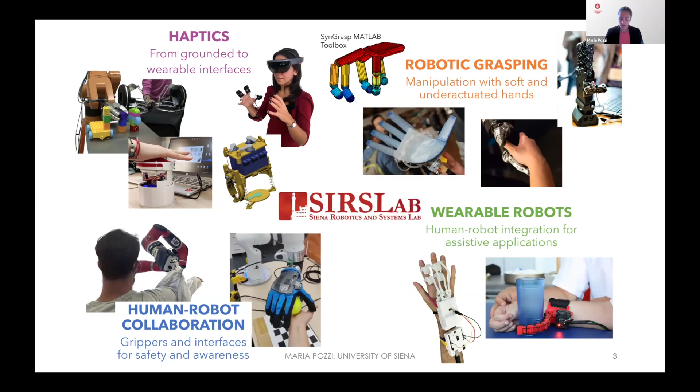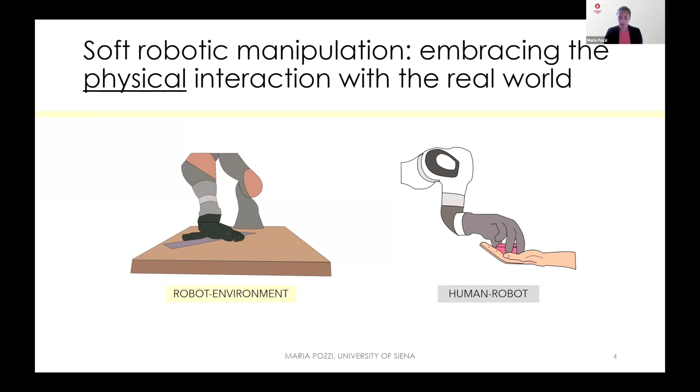Today I will focus more on the grasping part, okay? So, as I said in the title, soft robotic manipulation is really about embracing the physical interaction with the real world, because interaction is fundamental in every manipulation and grasping task, whether it is done with a rigid hand or with a soft hand.

But while rigid robotic hands are typically controlled to perform a certain type of interaction, the interaction is controlled and minimized typically, because if you see a grasp performed by a rigid gripper, usually this is performed as a precision grasp with a few contact points, and typically the environment surrounding the objects that are manipulated is perceived as an obstacle to the task, okay?

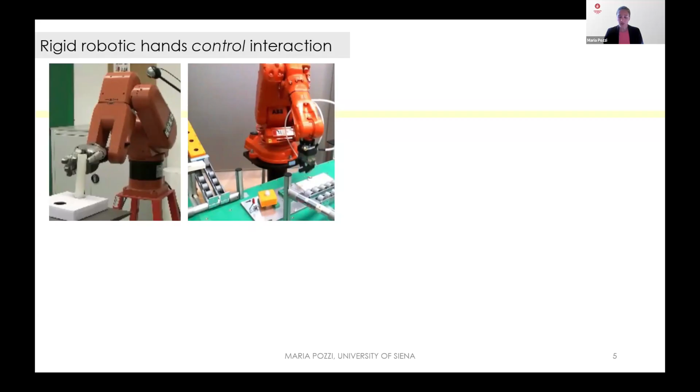On the other hand, soft manipulation embraces interaction in the sense that interaction is not only fundamental to actually achieve the grasp, but also it's exploited to perform a robust grasp. Here you see some examples. We will go through them a little bit.

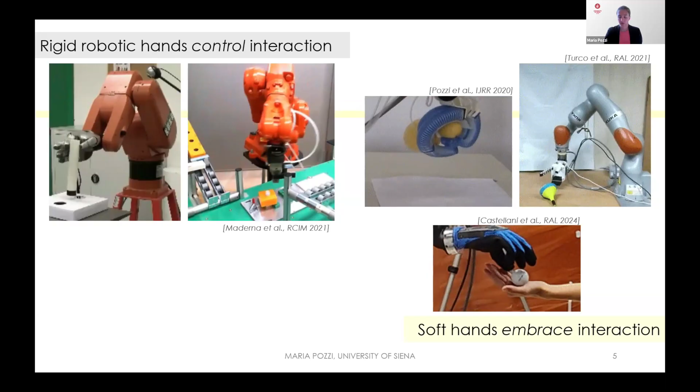The design of soft hands basically bridges two main research lines, that is the research line on robotic manipulation and grasping, and soft robotics. Soft manipulation shares the same philosophy of soft robotics, according to which embedding compliant elements into the gripper structure allows us to embody some intelligence directly in the hardware of the gripper.

This means that, as a result, in principle, there should be a reduction of the requirement in terms of perception and control, so the requirements on the software side. However, we are still struggling and we need to research how to actually design a certain robotic hand. How to design a clever hand, clever enough to perform a certain manipulation task.

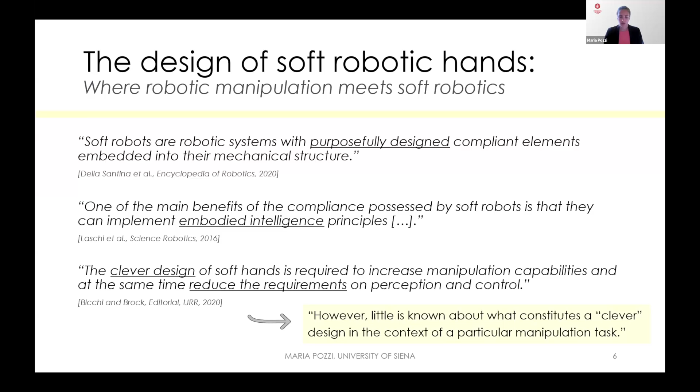This is a quote from a paper of 2020, but I think it still holds true, because although there have been some new efforts in the research community, a lot of newer results, we still need to continue in this line. So now I will briefly present some results we had related to the main question of how we can suitably exploit the hand-environment interaction in manipulation tasks.

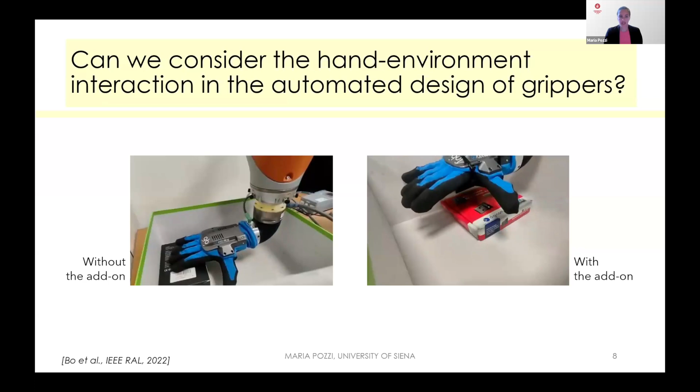I'll show it again. The hand is trying to grasp something in a box. Here it doesn't have a scoop. Here it has a scoop. As you can see, the scoop slides along the box and then separates the object, and it also opposes the thumb of the hand to grasp the object. So just thanks to a simple, rigid surface attached to a soft hand, we enabled a strategy that was not possible before with this kind of hand.

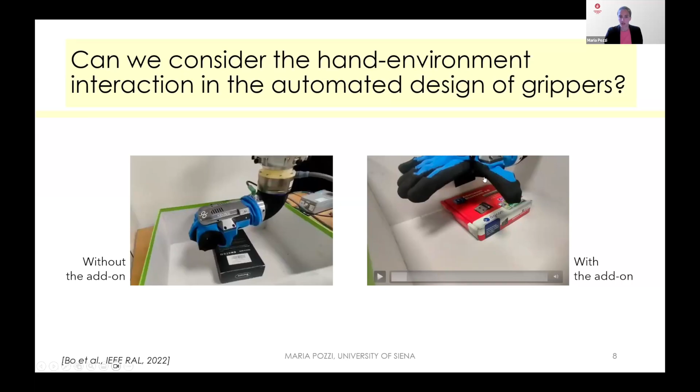To give you a little more detail, we created an automated design pipeline for these embedded constraints. The interesting thing is that we fed an optimization process not only with the hand model and the object models, which is typical in optimization-based grasp planning, but we also embedded information on the relative pose between the object and the environment. So the environment is part of the manipulation task.

In our optimization process, we optimized both a classical grasp quality measure and also the alignment of the scoop with respect to the environment. We obtained the parameters—length, width, distance, and orientation of the scoop on the hand palm—for several different grippers, testing them with several different objects. Then we had to cluster these parameters to find the most representative grippers to prototype. This first part was conducted in simulation.

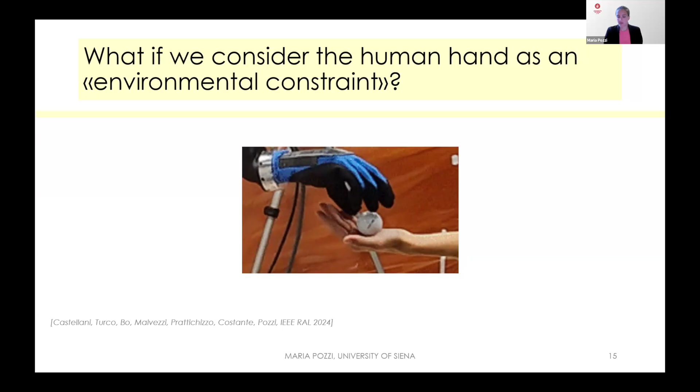So the next question for us was: we've seen that embracing interaction is very important in grasping and releasing objects, even with special strategies like the scoop gripper I showed you. Can we also exploit this kind of interaction in human-robot collaboration? We devised a handover strategy in which the human, with an open palm, brings an object to the robot, and the robot grasps it by sliding the fingers on the human hand. We asked ourselves whether this application would maintain the same properties we've seen in autonomous grasping, and whether this strategy would be accepted by users.

To implement this strategy, we implemented a perception pipeline, starting from the estimation of the hand pose, and then extracting the point cloud of the object. Based on the point cloud, we computed the bounding box of the object, and then performed the grasp. There is a certain intelligence in the perception pipeline. Once the hand goes down and closes on the object, it's the hand compliance that takes over and does the final part of the job.

In the video here, you saw a handover performed with our strategy, which we call the soft handover. We then compared this soft handover with the baseline, which is a position controlled strategy in which the hand goes down up to a certain height over the object and then grasps it.

In terms of results, first of all, we checked the success rate of the two strategies with different objects. We saw that for certain kinds of objects, the performance is quite similar, but with irregularly shaped objects and very small objects, the strategies are different.

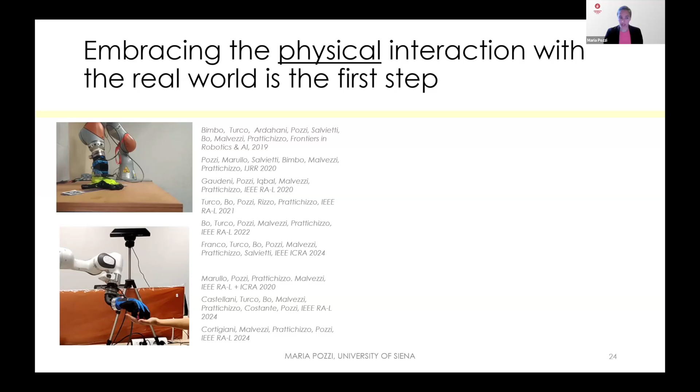And the part that is missing here, as I'm saying in the title, embracing the physical interaction with the real world is the first step towards creating systems that can actually help people in assistive scenarios, which are those that, as I said at the beginning, we are tackling in our lab. And what is missing, the second step, is to create a way to let the human and the robot communicate in an explicit way, not only through contact.

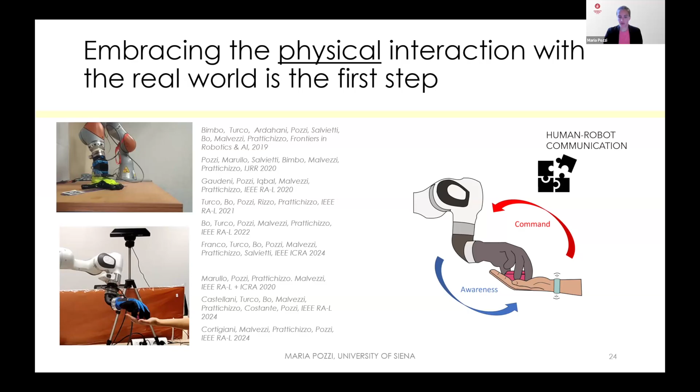So in our lab, we are also developing wearable interfaces that allow us to create a loop between the human and the robot. The human can send commands to the robot while interacting with it, and receive feedback, awareness, alerts from the robot, for example through haptic signals. So the missing part, which I didn't talk about much today, is the human-robot communication, so it's an interaction, but it's a non-physical interaction.

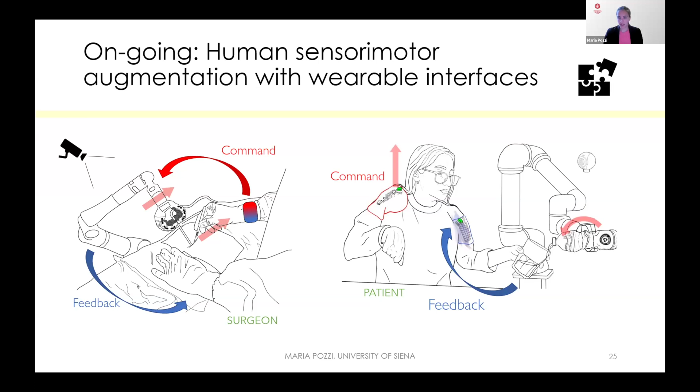And this missing part will allow us, and is allowing us, to tackle complex scenarios in which the user is connected to a robot and performs complex manipulation tasks, while the robot has grippers and the capabilities to actually interact with the real world. So with this, I would conclude my talk. Thank you for your attention, and thanks to all my collaborators and the projects for the huge work. Thank you.

Hi, Maria. Thanks very much for your talk. It's very interesting, like research and work. I'm pretty sure there are lots of questions. So maybe I can start with one question that is on page 10 of your slides. And I will share again then. Yeah. So page 10. Yeah. Yes.

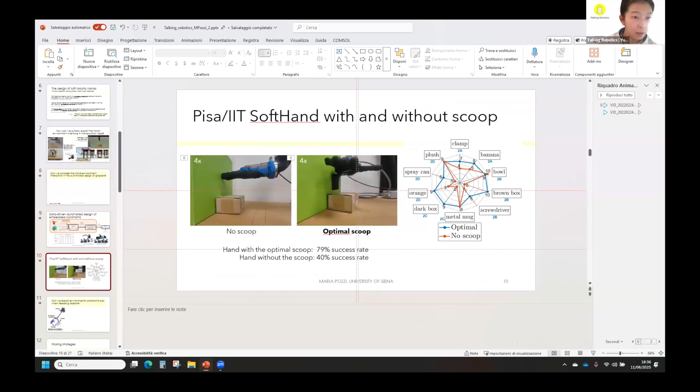So it's very interesting to see that the hands find an optimal scoop. But I'm wondering here, there is object information from the environment, right? So the previous work in the information of object, maybe, for example, the GraspNet, they use a camera to capture the point cloud and analyze which direction is the best or optimal way. So I'm wondering, is there any difference? For example, do you also use a camera or visual perception, or is there any other method you use to get the object information?

Yeah, indeed, I mean, I skipped this part, I just said it quickly. We had a camera supervising the task, and actually the camera was needed first. So the camera would take the point cloud of the object and of the environment, and the object-environment relative position. Then, thanks to a network that we trained, we would choose the best scoop, because we had several different scoops for each hand. So here we see, for example, for the Pisa hand, we found 4 different scoops. So based on the object and the position of the object with respect to the constraint, we would choose the best scoop and then align it with the environment. Whereas in the baseline, we were just computing using a simple planning based on the center of the object, which again was computed by vision.